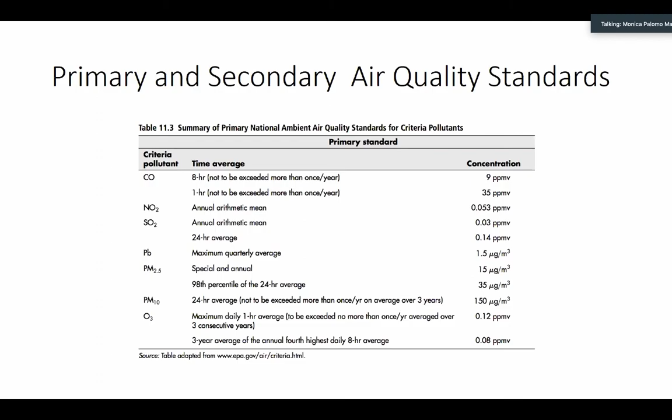So another table is going to show you California standards, and they're different. Many times California is more stringent, sometimes it's just the same, but it cannot allow higher concentration than national standards. National is the maximum concentration that could be allowed, and anything under will be fine if we can meet it. Technically, California has to put a lot of funding to be able to achieve stringent standards.

That's why earlier in the year, I don't know if you heard that Trump was going to modify some funding for California because we were very harsh on the standards for air quality. So that was one of the things that was going to happen due to California investing much more on achieving these stringent standards. So let's go back to carbon monoxide as we just talked.

So similarly, you can check. What are you going to do? You're designing something in California, you need to observe California standards. And if you observe California standards, you are always going to be meeting the national standards. But if you go somewhere else, another state, you need to observe the national standards and check if the state has different standards.

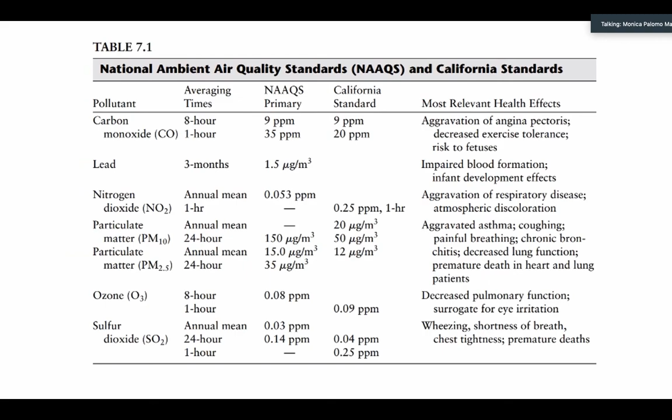So maybe in a problem, I can ask you, for this value, why would this be healthy or unhealthy, or describe the conditions of the air, giving AQI or giving the standards, and we're going to be doing problems. Actually, we have done problems already with a motorcycle, comparing to 9 ppm. I don't know if you remember the problem in the chemistry part. So we have done some problems, not with the AQI, but with the air quality standard. For the motorcycle, the carbon monoxide concentration came from this table, 9 ppm, right here. We used this in the past, I just didn't bring it up because I didn't want to throw a lot of new information at once and make you more confused.

Okay, so what are the effects, the health effects or concerns? It's not only about the health of humans, which is one of the most important things, right?

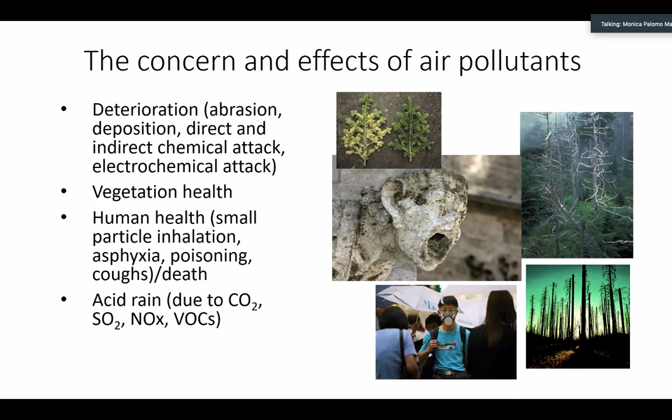We talk about toxic contaminants, particles that could be damaging our lungs. We have talked about acid rain coming down into trees or streams. All those acids can also be damaging for trees and for historical buildings, especially in olden times. Many buildings were built with calcium carbonate materials, and acid rain is dissolving calcium carbonate. Calcium carbonate is alkaline and tends to absorb hydrogens, and acid rain has a high concentration of hydrogens. So they combine and the carbonates wash off, or are dissolved. That's what happens with this sculpture here, being erased because of the dissolution of the minerals. So there is health, historical, and also ecological effects of pollutants in the air.

Any other effects? Ozone depletion, we were talking about. We have, or had, a hole in the ozone close to the South Pole, and the ozone is a barrier that protects us from the UV light that comes from sunlight. If there is a hole in there, the UV can come through, and then we could get cancer. It's too intense for our cells and damages the cells, producing carcinogenic cells.

Also, we are releasing a lot of emissions. The emissions are heating up the atmosphere, increasing the temperature, and that is causing a bunch of disasters. We're talking about climate change here, and the greenhouse gases released to the atmosphere are contributing to it. The greenhouse effect comes from CO2, but can also come from other gases like methane or the CFCs that are released from AC units that we have and need, and our refrigerators too. So there's got to be someone smart who wants to make a lot of money finding a different type of technology that can provide the same services without the same level of contamination.

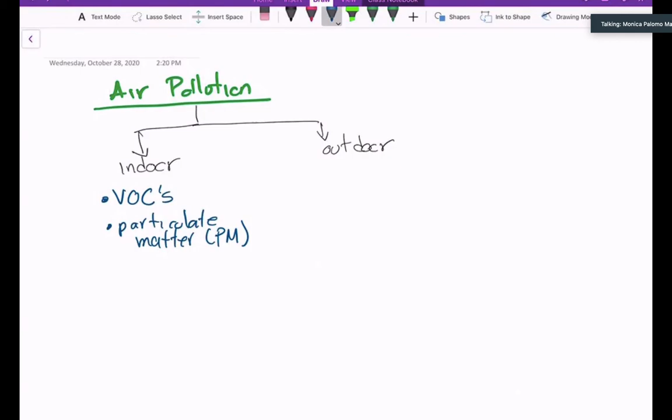Also particles, or particulate matter. PM is going to be very important. You need to make sure that you change those filters to ensure that the particulates are removed.

Outdoor, we're going to have industrial emissions. And also we can have emissions from nature. Can you give me an example? Some emissions are naturally occurring all the time. Volcanic eruption—there you go, Kelsey. Thank you so much, volcanic eruption.

What about CO2? Wait, that doesn't count as pollution, right? CO2, yes, it is pollution. Oh, okay.

Okay, someone is saying methane. Where is the methane coming from? Is that natural or is that industrial? From animals, methane from animals.

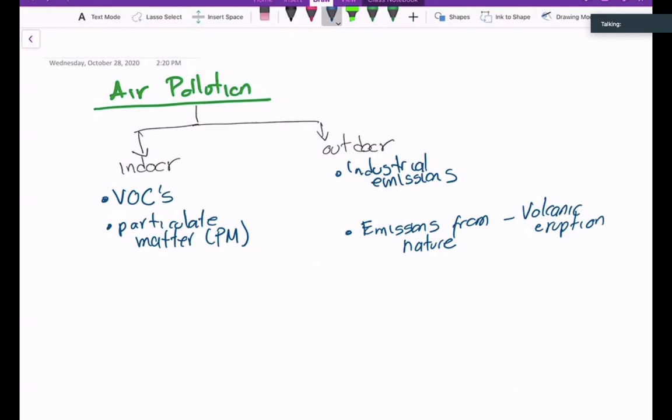Alrighty, okay, so I really like these ones. Emissions from nature—so would you say that animal facilities would be considered nature or industrial? I would say industrial because they're not necessarily like in nature, they're more like mass produced per se. I don't think it would happen naturally if they were in the wild. Well, I think if they were in the wild, it wouldn't be that many—probably maybe would be the concern.

So we're going to put it under industrial emissions, right? As for example, farms, animal facilities. And here we can have methane, right? Methane being produced, released into the atmosphere. All right.

Okay, what other type of industrial emission? Now that we went into industrial emissions, what else? Factory emissions? Factories, yes, thank you. You gave me what I needed, Brian.

Okie dokie, anything else from nature? Could it be like dust and pollen? Yes, perfect. There are naturally dust storms in New Mexico—have you heard about that? Dust in general, let's just say in general. And the dust storms in the Sahara that occur too, just naturally, and that represents pollution.

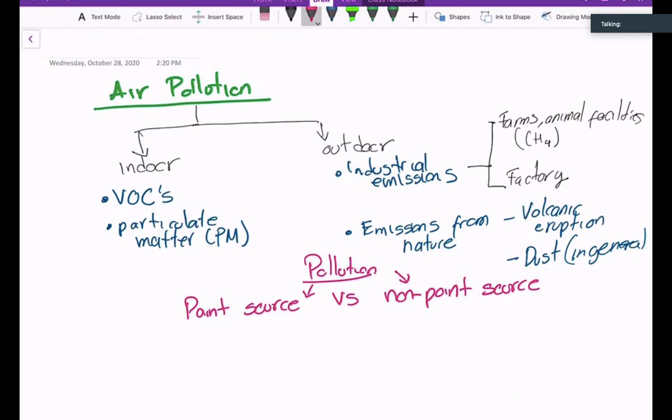Have you heard about point source pollution and non-point source pollution? No? Well, if you haven't heard about that, you're going to hear a lot about this in environmental engineering. The way that you propose your treatment is going to be related to the source of pollution being a point source versus a non-point source pollution.

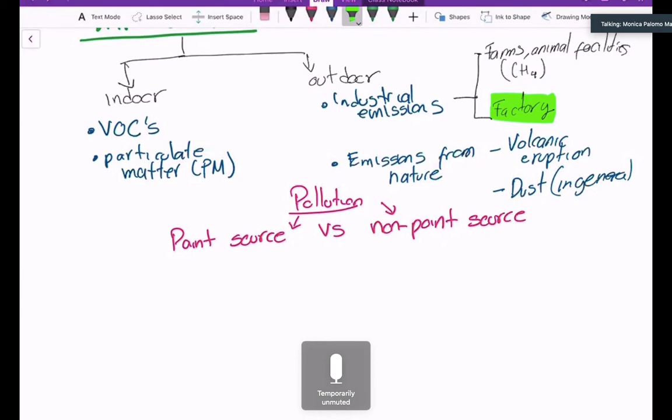So let me use the example of the factory. If we go to a factory and we walk around the facility, do you think you would be able to identify the place where they discharge the pollutants into the air? Just by visual inspection? I think in certain factories. In certain factories? But it's air, right? Gotta be something—if it's not, even if it's air with a different temperature, you will see the column of gas that just looks different in density because of the change in temperature.

So if you have ever been in a place where they do processing of the petroleum to produce gas—the refineries—have you ever been in one of those commercial industrial areas? No? Well, it's not a pretty place. So you can easily see the tower, and you can tell the emissions or the discharge of the pollutant into the environment very easily.

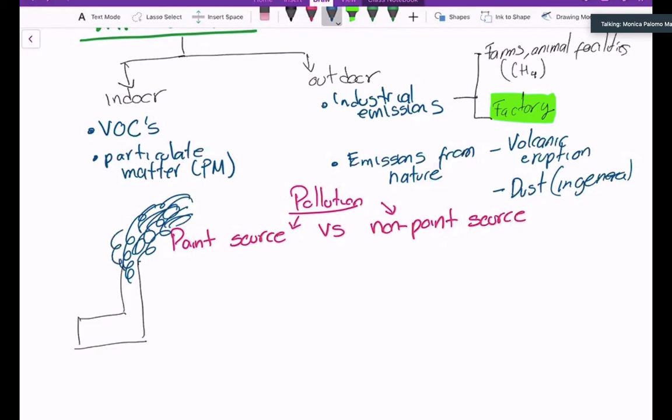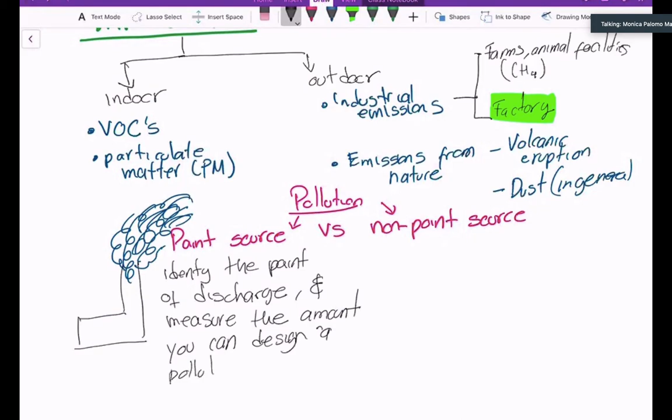If you can identify the point of discharge, and measure the amount, you can design a pollution control measure. What is a pollution control measure? Just a system that is actually going to be treating the gas. So if you can identify the point of discharge, you can measure the amount of the emission, and you can design a pollution control measure—that is a point source of the pollution.

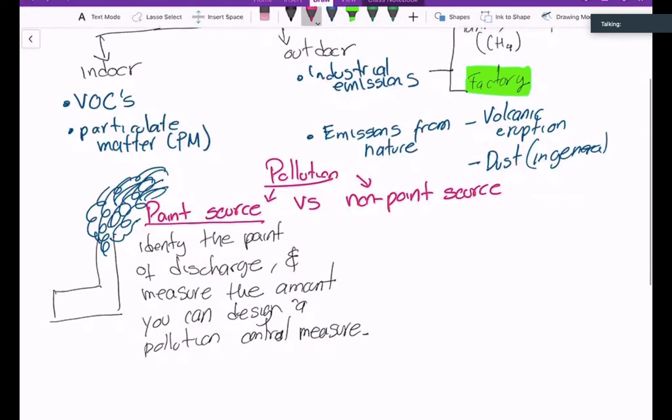So this is very, very easy—a factory is one example. Can you give me another example? One very close to you. There you go, thank you. Someone in the chat is saying vehicles. Your car is a point source of pollution. Why? Because you know where the emissions are released. And do we do anything to treat the gas before it's released into the environment, or do we just let the gas produced by the combustion go into the air?

Typically, car exhaust systems have filters in them to try to mitigate as much of the pollution that will be emitted. But at the same time, that's part of the reason why we have smog checks. So the cars have air filters, to ensure that the air is filtered clean, and then we have smog checks.

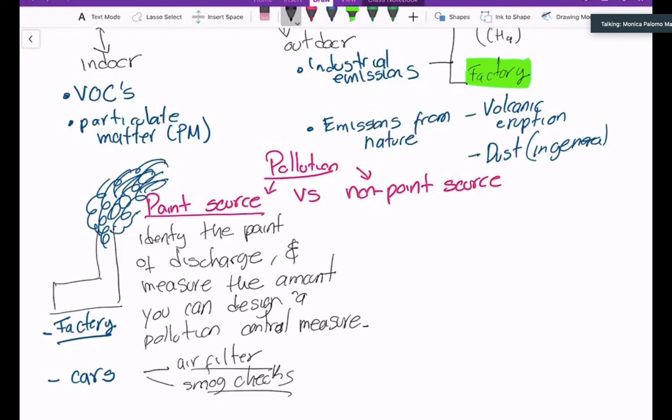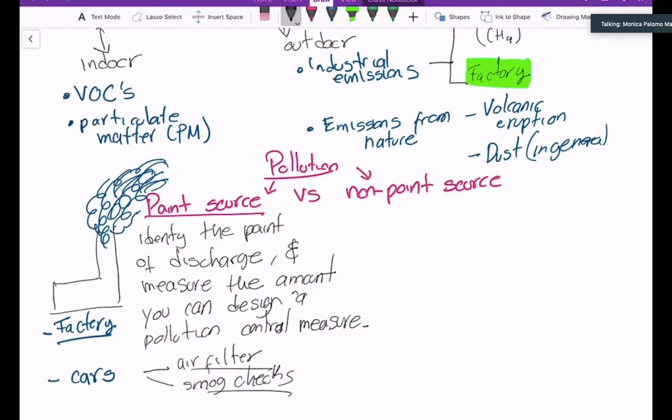So can you tell me, can you visually identify the point of discharge in a car? Yes. Can we measure the amount of the emission? Yes, not visually, but we can take it to the smog check and they will check the emissions. And is there any device designed to control or reduce the emission of the car?

I think on cars it's called a catalytic converter. So it might be very specific technical terms. Also, you have to take the car for regular maintenance to ensure that it's up to speed and doesn't start burning inefficiently, releasing more toxic particles or decreasing the quality of the emissions. So it would be fitting the definition of point source pollution.

Now, what is a non-point source pollution? What do you think it is? You don't need to give me the definition, just give me an example, whatever is easier.

Contamination in groundwater, there you go. That's perfect, let's put contamination in groundwater. Why? There might be multiple points of entry in the water table, or you can't identify exactly where it's coming from. The contamination in the groundwater is underground. We don't know where it's exactly coming from. It's really hard to determine what is the hotspot, the one with the higher concentration. So we're going to be blind with groundwater.

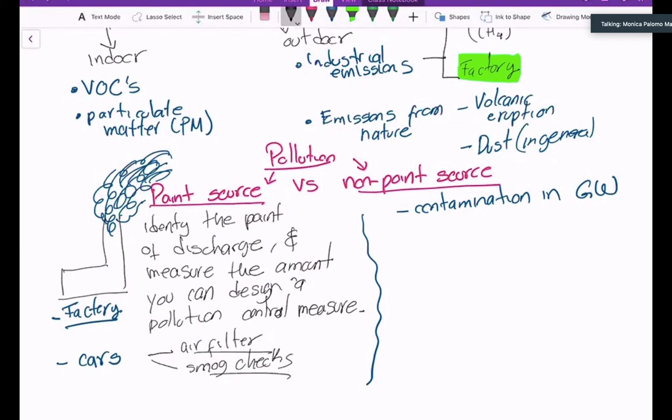Any other example? Stormwater runoff. Yes, why would that be a non-point source pollution? Because the water travels across urban areas and then is discharged into one location, so you don't know what's in it or where it came from.

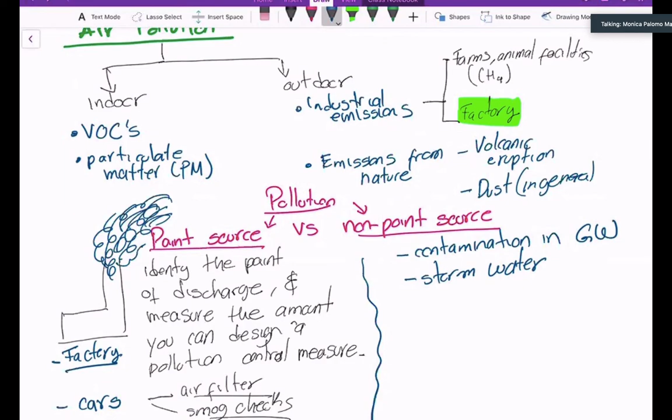Exactly, stormwater could be going through different areas and dragging all the pollutants with it. There might be some ways to mitigate this pollution, but it's going to require a large land area to do something about it, versus point source pollution which is smaller and very well defined. I'll give you the third one since we already have it on the board: farms and animal facilities.

Some of you are saying there's going to be some methane coming into the air due to animal production. Yes, the animals are going to be out there, we know exactly the area where it is, but we cannot really capture all the methane from the cows, treat it, and use it for energy, because it's just out there over too much land.

So when we're talking about non-point source pollution, we have an idea of the area where the pollution occurs, but it is difficult to quantify. It can be coming from many different places, it can have many sources, it can be moving, like the cows. And then it's going to be hard, it is difficult to have a central treatment.

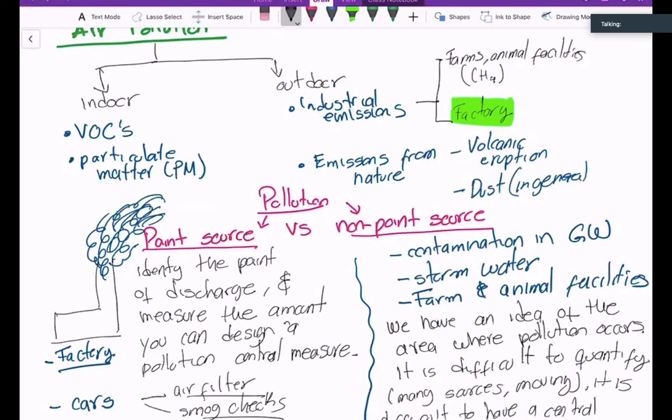So what do we do? How do we do this? Well, every cow is going to have an average discharge of methane, and if we have 2,000 cows, we have a limit on the discharge of methane. And if for any reason I have more cows because I want to make more money, then I need to pay some money because I'm exceeding the limit of discharge. So it's kind of ishy-wishy.

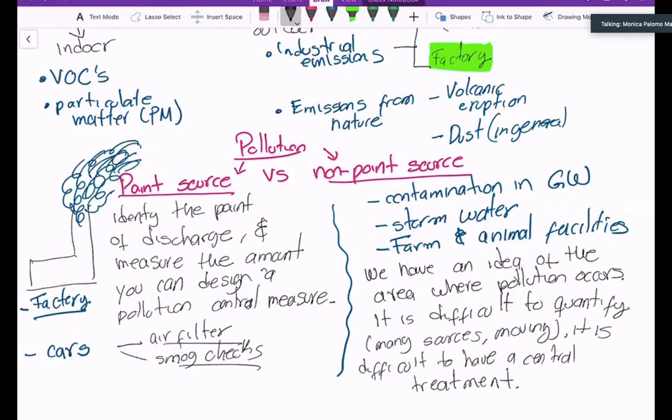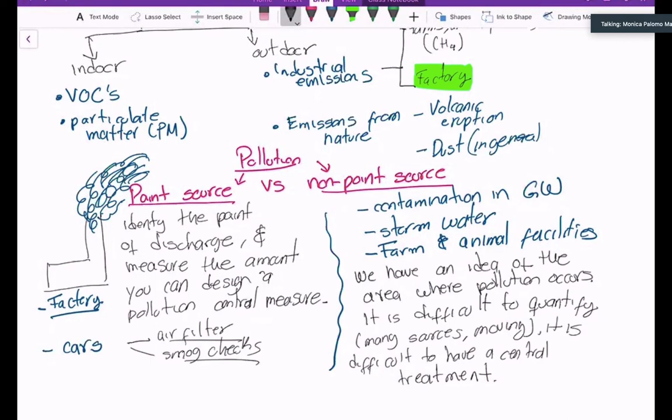In this non-point source pollution world, sometimes whoever is contaminating in a situation like this, or responsible for such type of pollution, needs to pay a fine, or someone that is not contaminating as much gets paid by that person, because they get credit for not contaminating as much. So if you really like politics, you're going to love the non-point source pollution world. It's a lot of trade-offs and exchanges of credits for the pollutants that are released or not released in a given time. So there's going to be permits depending on what is happening.

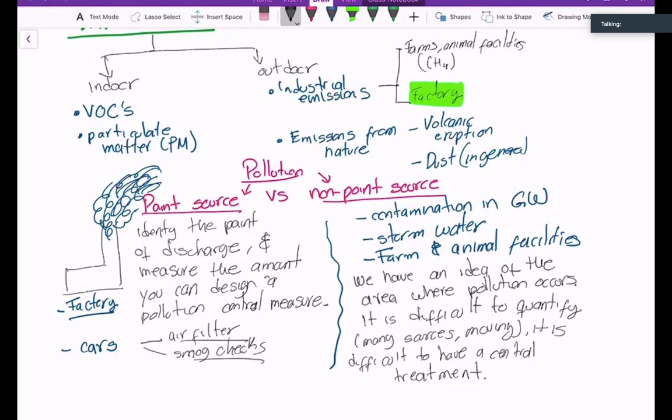So does it make sense now? Point source and non-point source pollution? Right? Thumbs up. No, there is no thumbs down. Only thumbs up, right? Okay, some of you are saying yes on the chat.

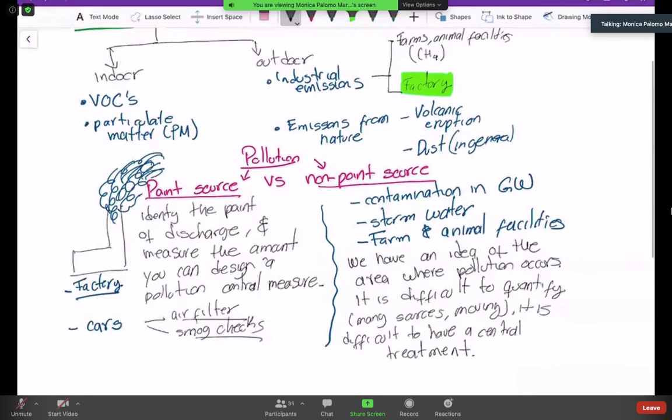Perfect. All right. So let's talk about emissions, and we talk about primary pollutants and secondary pollutants. Just to make sure that's on your notes.

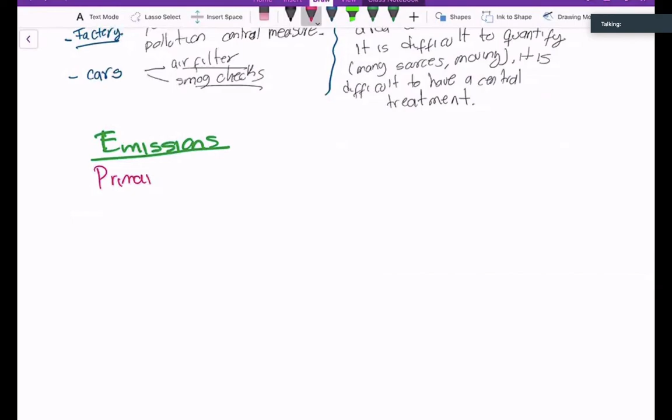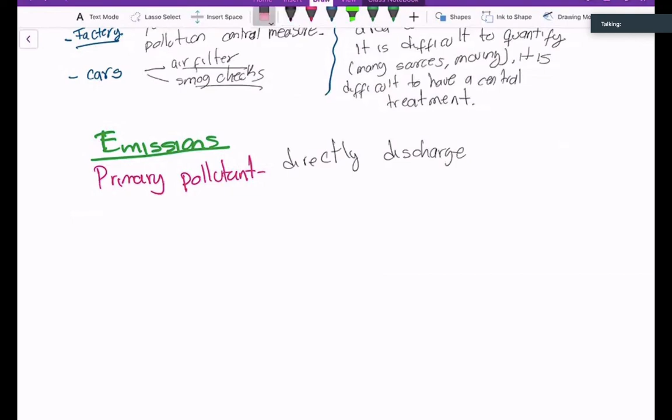We have primary. Why do we say that's the primary pollutant? The one that is directly discharged. Thank you. Directly discharged in the air. And then we're going to have a secondary pollutant.

And how do we differentiate them? Secondary pollutants are the result of primary pollutants and their reaction with the atmosphere. There you go, they are formed in the atmosphere. Thank you so much. How are they formed? Due to reactions. They can be chemical or physical reactions. Okay, so chemistry is always going to be with us.

So I'm going to be changing the page. Is everybody okay with this? Everybody has it down? Yes, I have most of the tiles up, so give me thumbs up, or maybe the chat. Alright, okay. I'm going to be checking with you. Someone told me today in office hours that sometimes I'm going too fast and you miss things, so before I change, I'm going to be checking.

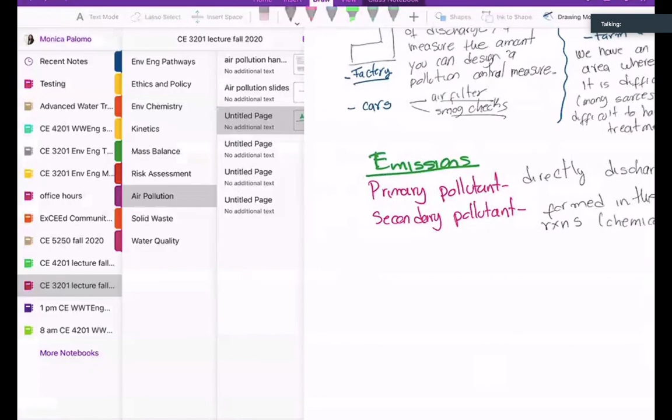Alright, so I'm going to change now. I saw the thumbs up. Page number 2. So I don't think that I mentioned this, but I think it's very important to put here that the pollution is categorized by the way it has been created, the pollutant emissions. So pollution emissions can be classified by how they were created.

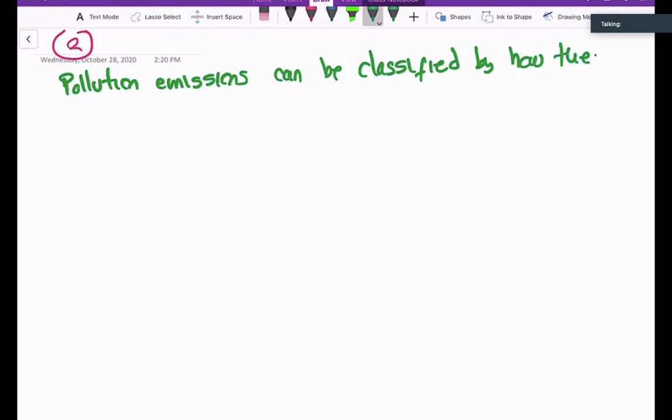And one of them is going to be combustion, and we have talked about that already, the cars and the combustion of the gas or the fuel. It could be evaporation, and we have talked about that too, VOCs, right? And this is just making it very, very specific. And the last one that we have also talked about is grinding or abrasion, and that's formation of particles from solid particles. So the PMs, the particulate matter, can be formed due to the grinding.

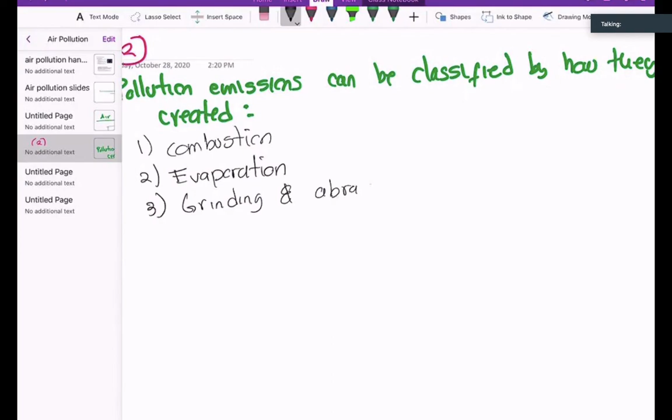Grinding and abrasion. So these are the 3 different ways that we could get those particles in the atmosphere, or indoors even.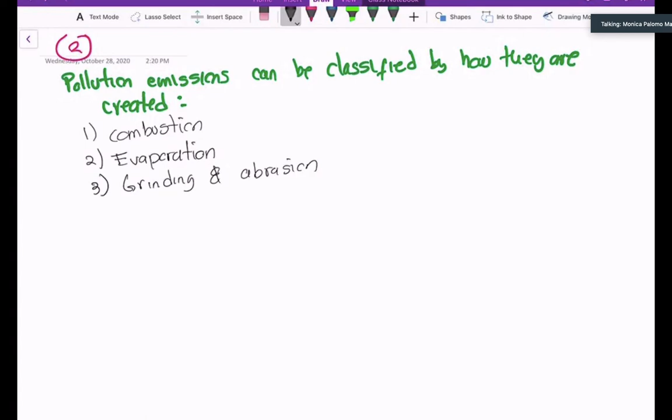The source of pollutants, we already talked about them, this is just slightly different. Could be mobile and stationary. Can you give me some examples of mobile or stationary?

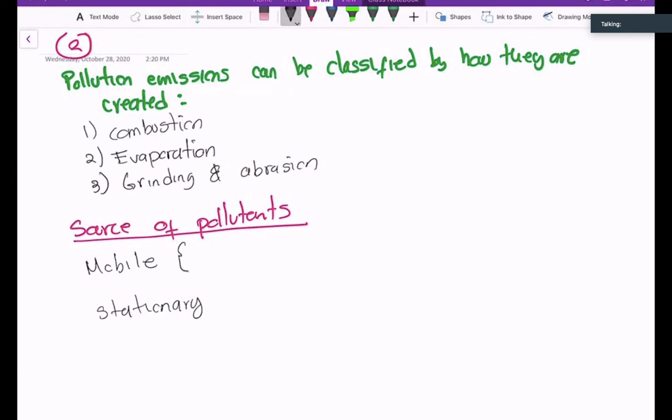Just think about the air. What is moving? Mobile, cars. Cars, railroads. Well, let's put it in here. It's trains, ships, planes. What about cows?

Cows move around, right? And what's stationary? Factories. Okay, what else? Power plants. Gas stations. Gas stations, yes. Or homes are stationary. Oh, you got it, someone said it as soon as I mentioned it.

We were thinking of like homes. Homes are stationary too, unless they are, how do you call those that you drive around? I forgot. Well, you know what I'm saying, those moving homes. RV. RVs, yeah, thank you, like I was escaping. And the farms, right? Farms and all the agriculture facilities, etc.

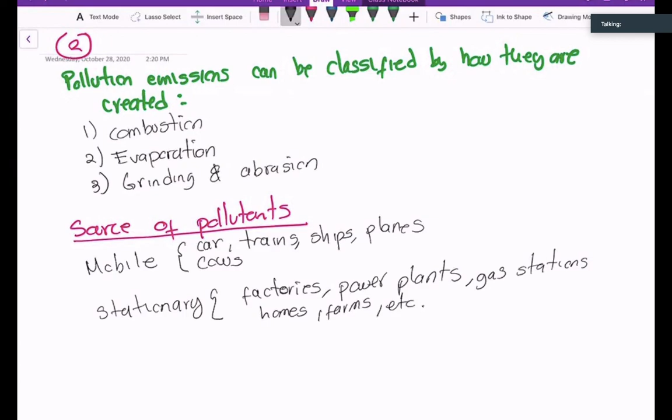So there are a bunch of things that cause air contamination. Okay, who can tell me the 3 different things that we talk about in terms of air policy or regulations? No?

Remember that we talked about the Weather Channel? Are you talking about today or a different one? Yeah, today, just a few minutes ago when I had the PowerPoint up. The National Ambient Air Quality Standards. Mm-hmm. National Emission Standards for Hazardous Air Pollutants. Okay, oops, and what was the last one?

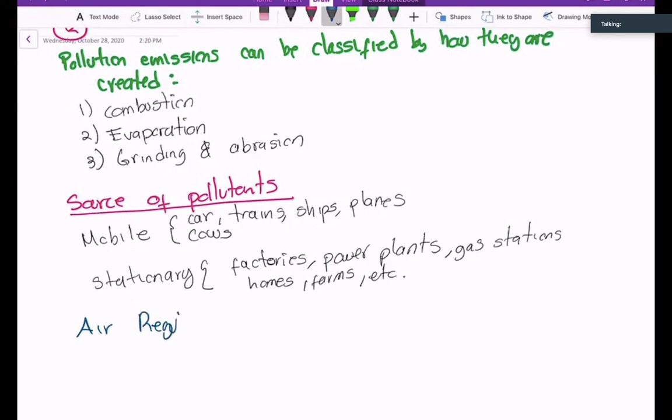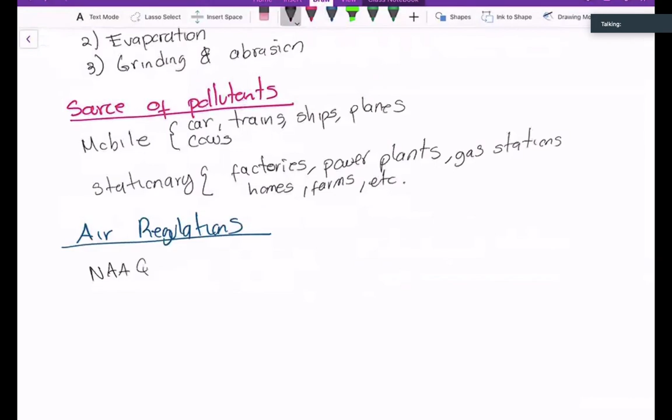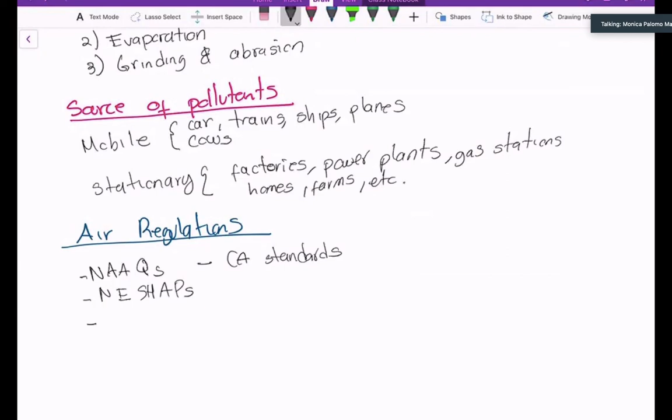Next, NESHAPs. And what is the last one? Anyone remember? Was it the California standards? Well, we can say California standards too, next to the national air quality standards, right? And that parameter that sometimes is given in local stations, weather stations, the AQI, air quality index. So these three are all under the Clean Air Act, established in the 1970s.

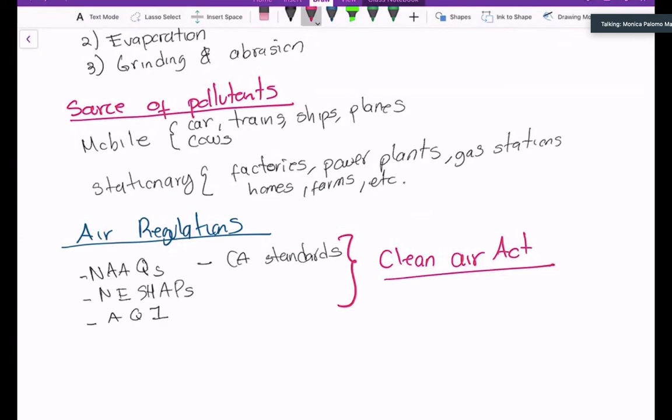All right, so I'm putting everything together just to ensure you can go back and remember what we talked about. Now we're moving from air quality standards to indoor pollution, and point source versus non-point source pollution. I'm going to take you to the point source pollution world, and classify the ways of pollution control, the types of treatments or technology that can be used to control contamination coming from point source pollution.

So this is going to be air pollution treatment and control for point source. Factories, okay, that will be an example. And I'm just going to leave it in there.

One is gonna be gaseous, and the second one is gonna be the particulate matter. Let's talk about the gaseous one first. I'm gonna list them, and then we're gonna go to the slides to show you photos of how they look, and then we're gonna do the design of two types, both for particulate matter.

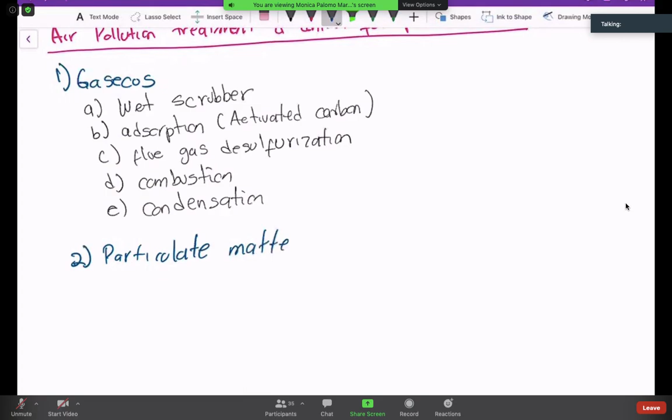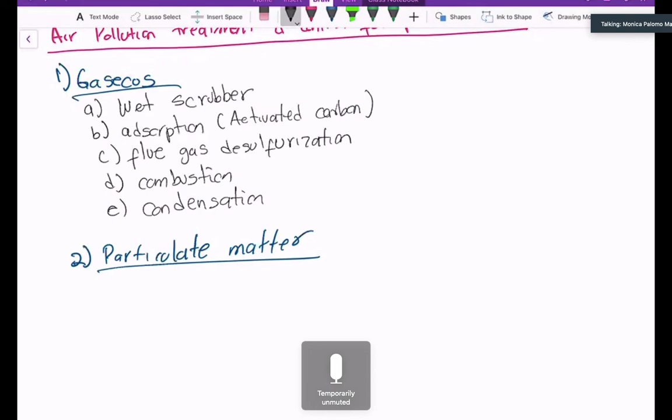Professor, what does it say under C? Combustion? No, C, part C, right after B. This one? Yeah. FLUE, flue gas. All right, thank you.

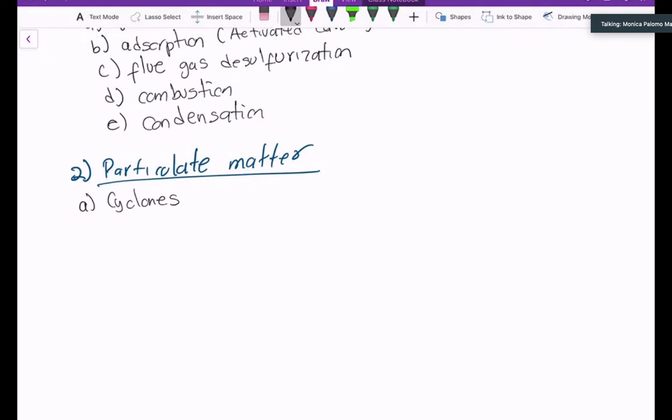And then for the particulate matter, we're gonna have cyclones. Cyclones are just towers that spin the air, producing different velocities for particles and air. They're called collectors, cyclone collectors.

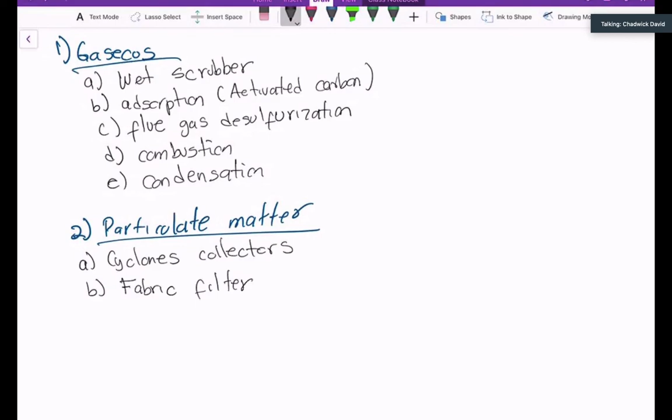Dr. Palomo, maybe you could scroll up to number one. Yes. Okay, that helps. Yes, I push it up most of the time because then my hand is below the outside of the iPad, and I tend to erase. What did it say above it where it said gaseous? I don't know if I got that down. It's gaseous, yes, it's gas. Was there anything above that though? Oh, okay, there we go.

All right, then we have fabric filter. Have you ever used a vacuum cleaner? Yes? At least seen it? Well, it's similar to a vacuum cleaner, very similar, especially the older ones, the ones my mom had when I was little, long time ago. It's very similar to that one - you could take the bag out. These fabric filters have bags in there that you can exchange when they're full.

And the next one is going to be the Venturi or Venturi scrubber. It's a combination of the principle of the wet scrubber with the Venturi. And then we're going to have electrostatic precipitator. And then finally, sedimentation, or gravitational settling chambers.

This settling chamber uses exactly the same principle that we will use later to design settling basins in water treatment or for wastewater. So it works for any fluid, just with a slightly different density depending on the fluid we're working with.

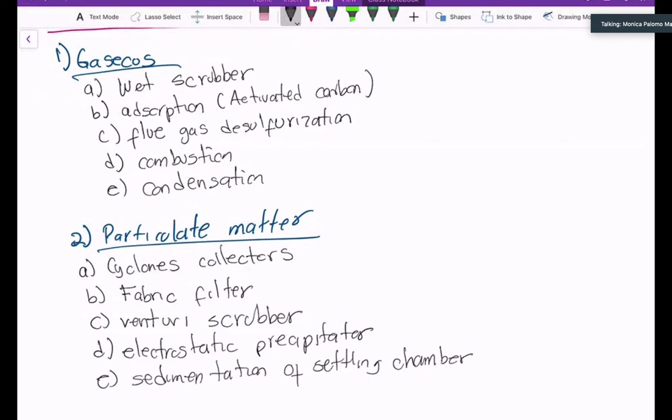So again, these are different pollution control measures or systems for air pollution, for gaseous pollutants and for particulate matter. What are the sizes we're going to be looking to remove from the air?

Remember the sizes: 2.5 and 10 micrometers. Remember the units. Sometimes on the test I ask what unit is associated with the 2.5 and the 10, and students always answer meters. I'm like, oh no, that cannot be particulate matter. Just think about the unit.

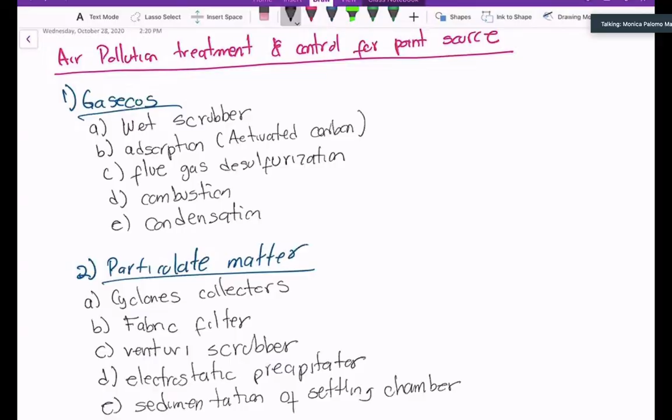It's micrometers. Okay, so I just got off the whiteboard, and let's go back to show you the different ways of treating the air with photos. We're going to be doing some design problems with it today. All right, so I'm going to go to the laptop now.

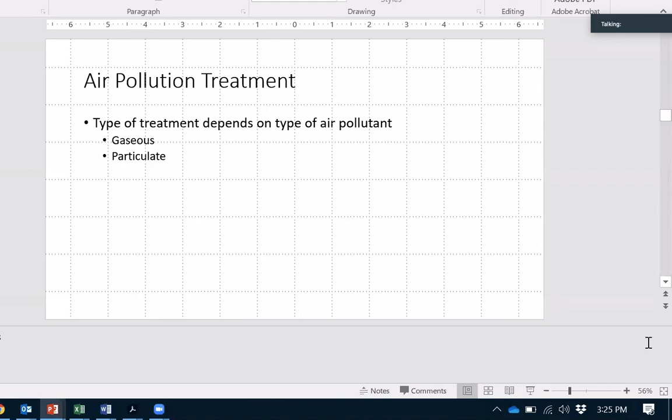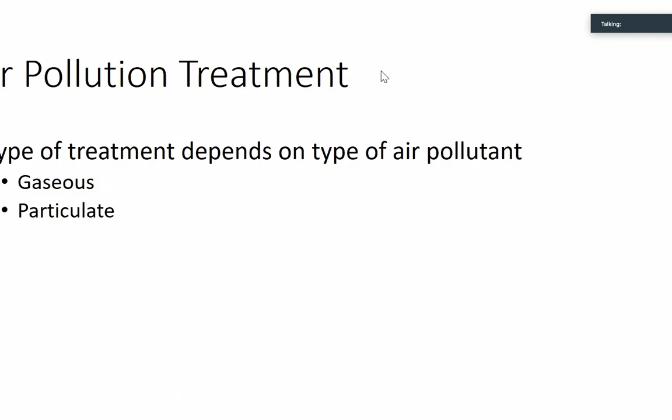see it. All right. Okay.

So we talked about the two types of pollution control, gaseous and particulate matter. Now we are going to show you how they look.

The great news for us is that all of this is commercially available, so we don't really need to design or size the tower ourselves, or have an idea of what size we need based on the flow, how much air we're treating, and what the concentration of the contaminant is that we want to remove. We do need to know that, but we're going to be working with the vendors of this equipment, telling them the air quality and the flow rate of our air, and they're going to help us select the best size.

You're going to tell them if you have any restriction of space where you're working, or whether the area is indoors or outdoors. They're going to tell you about the ventilation requirements. So in terms of design, it's going to be a lot of work with the vendor. You just need to know the flow, the concentration, and the type of pollutant, and they'll tell you what's inside.

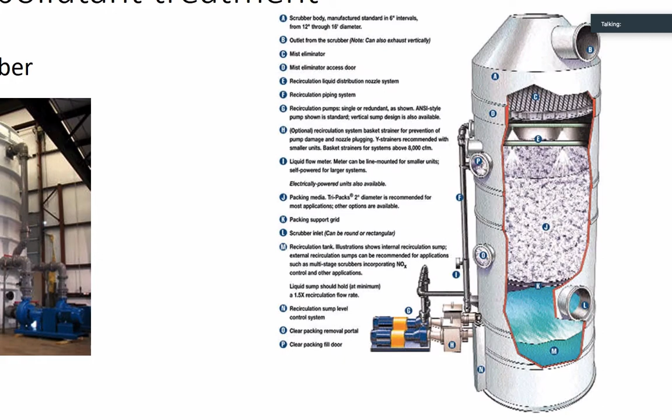It's going to come through the water, and as it goes through the water, the gas you want to remove from the air is going to be left behind in the water. There may be some droplets that come up with the air, and that's what another bed of media is for — removing those liquid droplets and any gas that might still be in that liquid. Then finally, there's another layer on top.

It's very small, but it's like a mesh labeled C that helps dry or remove moisture from the air before it's released at the top of the device. So it's a very simple process. The only thing you need to take care of is knowing the liquid and the packing material, just to make sure that's what you need for the gas you're trying to remove from the air.

Also, what about the removal rate? Based on your concentration, you may or may not achieve full removal, so don't think you need to design for 100% removal. What number do you need to design for at the outlet in this tubing labeled B? Do you want to get all the way down to zero?

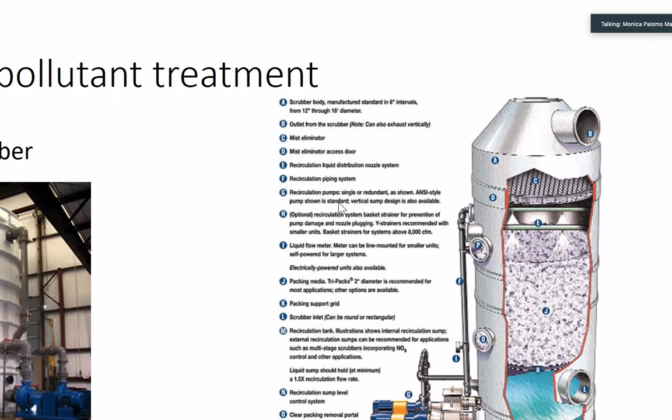How low? I don't know a chemical specifically, but what number will be here for you to do your design? Standard. You need to be looking at the standard. Are the standard, or maybe this company has a permit that allows them to discharge this amount per year, per day, per month, and based on that you back calculate how much will be discharged depending on the flow you're discharging and for how long, etc. So it's important that you keep that in mind.

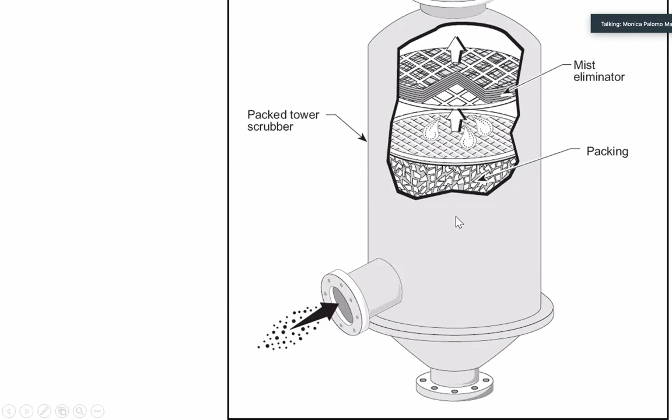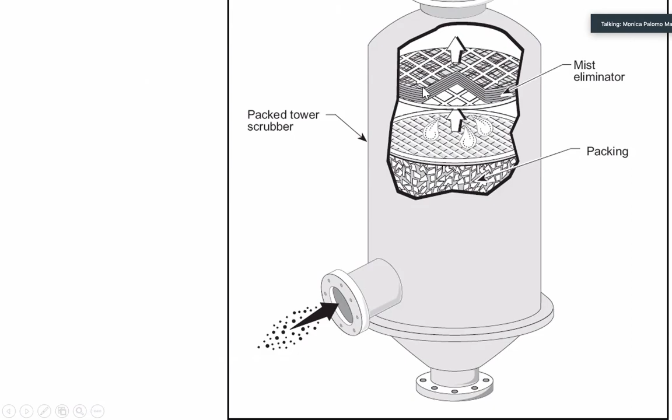This is another image of a wet scrubber, a simpler one. The air goes in on the bottom. There is a pool of solution in there that is going to be scrubbing the gases. And then the air continues up through the packing, whatever the packing is, and the meshes to eliminate the moisture, and finally goes up. It's a very simple way to put it. It's just important to know the details of what's in the packing.

There is another way of treatment, and we already talked about this: adsorption with activated carbon, which is going to be one of the easiest ones to go. In this case, you will need to size your tank or your system. Some companies already have those commercially available, and you will just need to say, depending on your flow and the chemical, calculate based on the givens from your vendor what will be the adsorption time before you exhaust the bed in the carbon, and then see if you can clean it and recover it. Usually that's going to be done, or you need to remove it and just incinerate it.

Combustion is the next way to remove something from the gas. I don't think that this is the best way to address it. Usually these are going to be volatile organic compounds. They need to be ignited to be able to go to combustion, to be removed. I have seen, I don't know if I've shared with you, I am from Mexico, and combustion of gases that could be oxidized in air was one of the most common ways of removing them from the air when I was back in Mexico. So I don't think that is really friendly for the environment, but it's done.

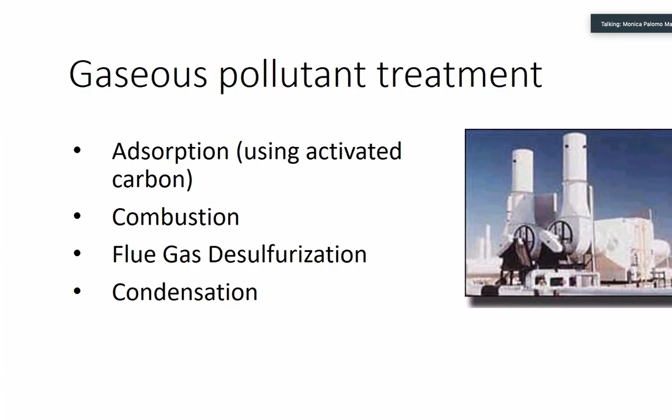The good news is whenever we do this type of treatment, we're going to have a vendor working with us and selecting the best option. And if you're working with this type of pollution control device, you're going to have a senior engineer working with you, probably guiding you on what would be the best one. In many cases, the young engineers are going to go and do the search and talk to vendors, and the senior engineer is going to come and decide which one to go with after having all the information. Or maybe you're working in the public sector, you might be looking into whatever the engineers bring you, and then you need to know which one might be better.

You know your city, you know the facilities, and maintenance is going to be very important to keep in mind if you're on the public side. Maintenance and operation, what kind of operator you need, the grade, and how often you need to clean something. So the young engineers, when doing this type of design, need to provide a maintenance and operation guide for the client.

So you could be either on the client side or on the team that is designing. Let's talk about particles. It's a physical process because we have particles.

We have an advantage when it's related to air. We can easily trap the air in one of these two systems, the cyclone or the fabric filter, and induce through flow the removal of these particles.

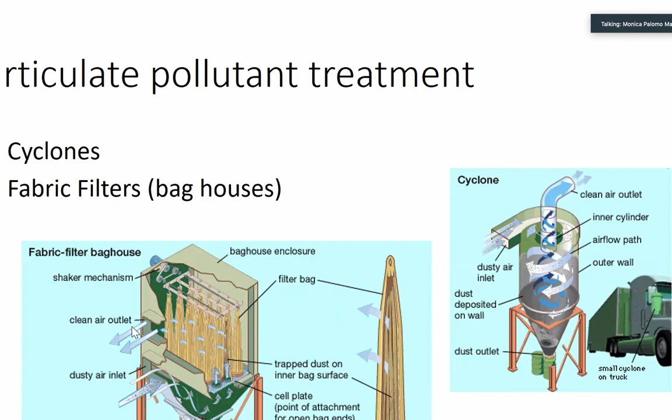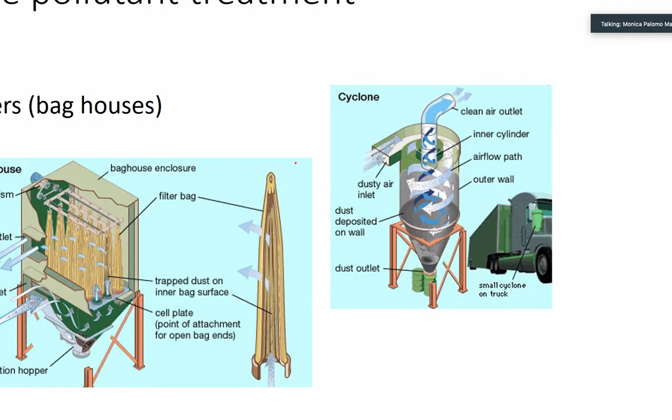The fabric filter on your left is right here. I'm showing you... okay, my pen is not working, I don't know why. No, it's not working, I'm sorry. I was trying to use a PowerPoint tool to show you.

On the center, we have the bag. From the bottom, you can see the air goes through and the particles are going to be stuck inside of the bag. Once the particles clog the bag, then you're going to need to change it.

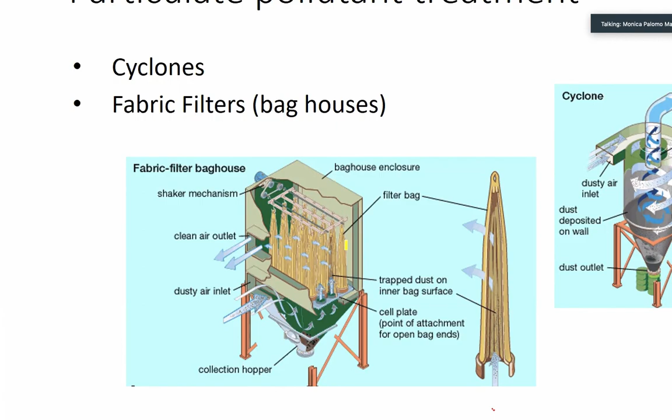The capacity of the filter depends on the flow and the concentration of the particles, which should be on the specifications given by the vendor. The amount of flow you're going to be treating determines the size of the bag. Every bag has a given filter capacity, and based on that capacity and the flow you're treating, you determine the number of bags. So it's a very simple calculation to design the size of your system.

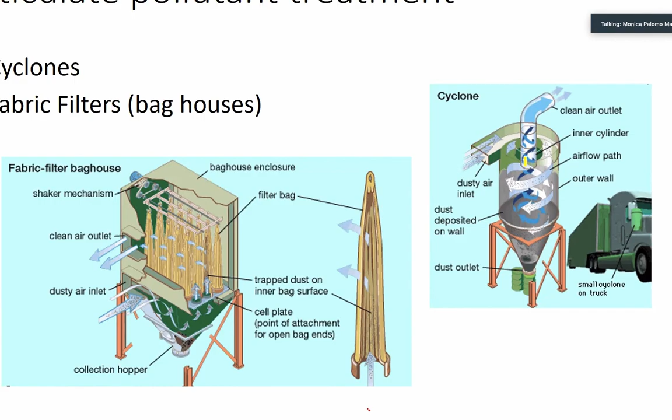What it's doing is pushing the particles, which are affected by gravity, down and precipitating and collecting them in drums or sometimes trucks. Then the air, because it's lighter, goes back up and escapes through the outlet. So pretty simple, nothing fancy.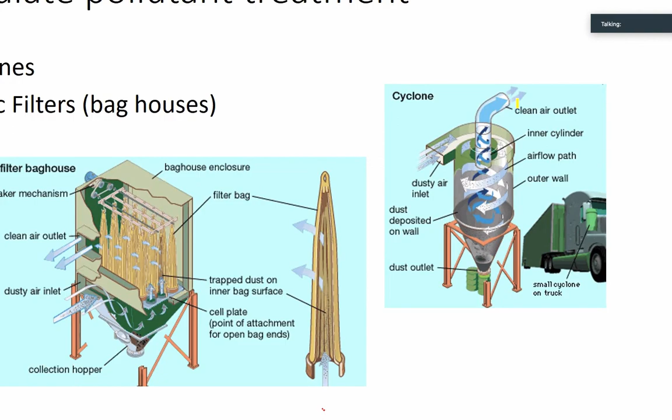Just depending on the flow you are treating and also the particle size, you need to work with your vendor to find the appropriate size to treat or remove particles from a given device, or maybe you already have the particle size and can go directly and look for the system that gives you that.

Now here on the right, I want to show you the Venturi scrubber. It's very similar to water resources—actually, it's the fluids class. In fluids, we talk about ways to measure flow.

A Venturi meter is one of the best, calibrated ways to measure flow. It's used for that, but also because the reduction in cross section increases the velocity, and by that change of velocity we can estimate the flow. By increasing the velocity, it induces changes in how the particle, contaminant, and gas interact, allowing us to separate them just by that change of velocity.

The other exciting one is electrostatic precipitation. Very simple—there are some plates connected to current. There is energy or current always going through the plate. As the airflow moves from one side of the plate to the other, those particles interact with it.

Most of the time the particles have a charge. If there's a current in there, they'll stick to the plate and be removed from the air that way. It's more expensive, but for very fine charged particles, it's one of the most efficient ways to remove them and comply with standards or discharge limits depending on the type of industry you're working with.

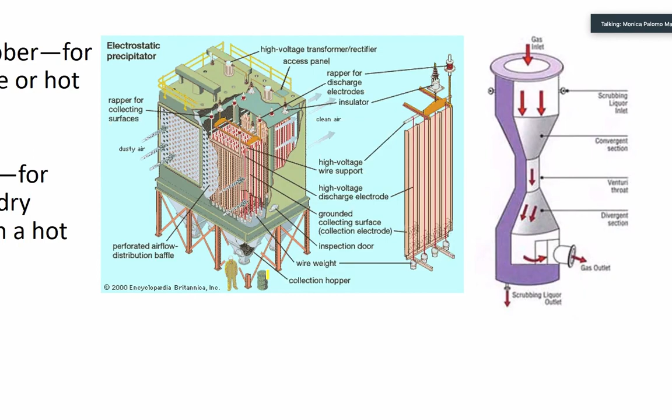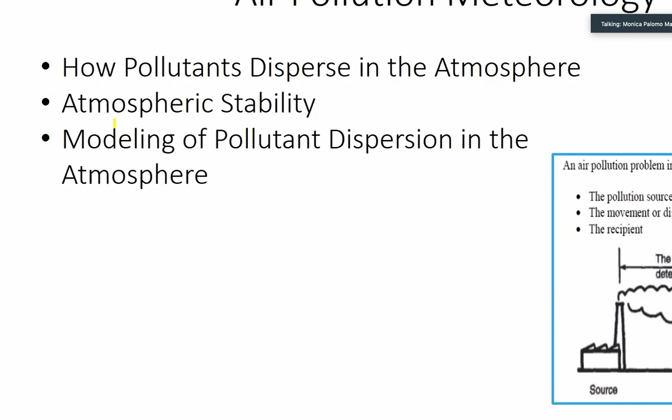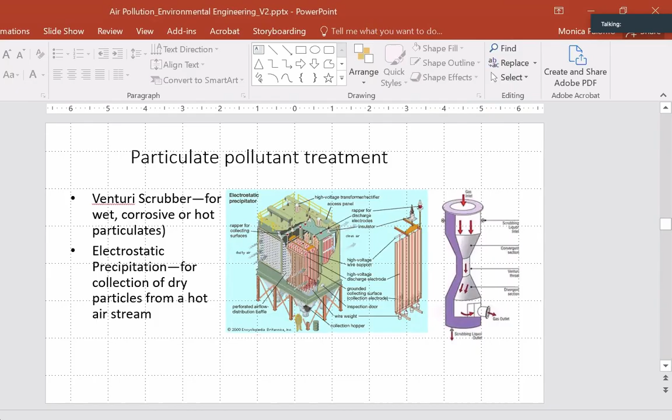So these treatments are very easy to understand. We're going to stop here because we're going to do a problem. We have 6 minutes, so we can start the problem. Questions so far? No questions? Okay, we have a comment on the chat. Oh, no questions, okay, thank you so much.

So now you're seeing that we're going to design, we're going to start sizing or looking into how big, depending on the flow, what is the concentration. We're going to need to use chemistry to size or determine quantities, but it's going to be way more practical—we're going to use that chemistry to help us on our decisions.

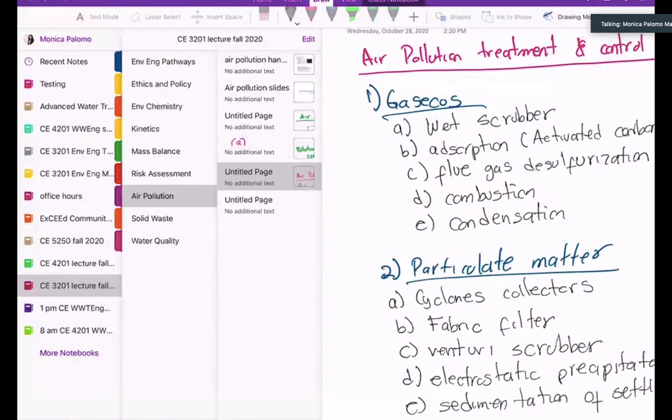So now there is a bunch of practice problems, or in this case, solved problems. There is a bunch of solved problems in your textbook that I want you to start looking at, especially 7.1 to 7.7. Later, the other problems I'm putting in there have some details, like 7.11, the speed change with elevation, or downwind ground level concentration—all of that we're going to talk about in the next section once we do the design problems. But you can start looking at some of the solved problems that are there, okay?

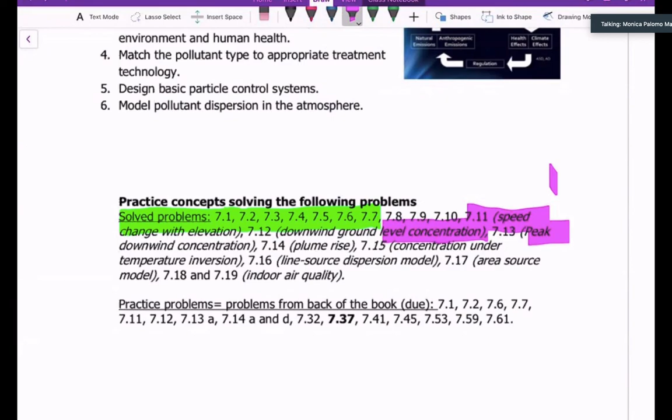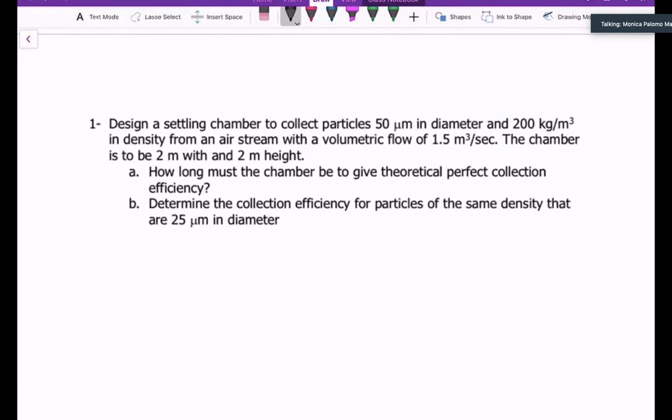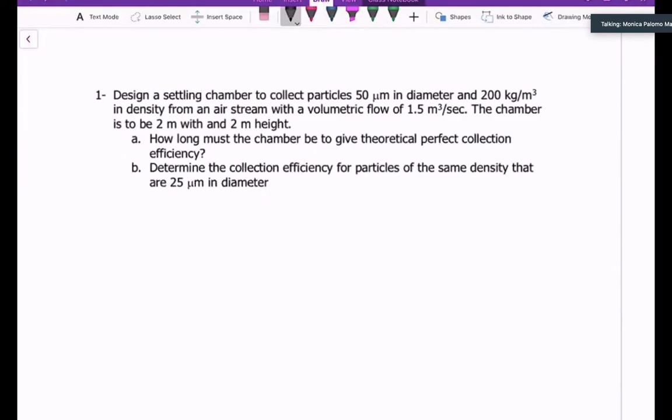So let's go to the settling chamber. This problem is really fun, I really like it—we're going to be actually sizing something to treat air. So it says in here, let's read the problem—we don't have a lot of time, but we have time to understand. We have to design a settling chamber to collect 50 micrometers in diameter particles, and they have a 200 kilograms per cubic meter density, so we need to know some properties of those particles. They are in an airstream with a volumetric flow rate of 1.5 cubic meters per second.

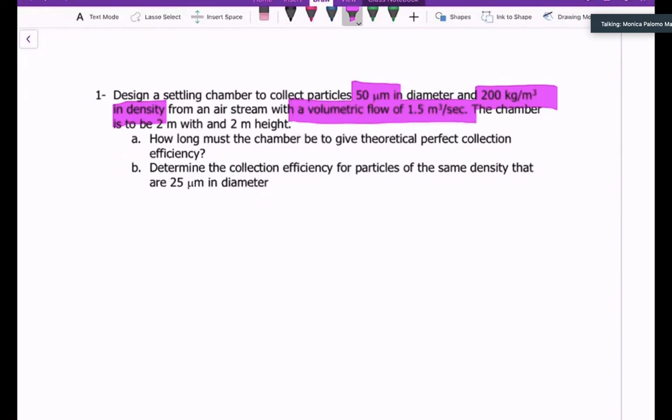The chamber is to be 2 meters width—sorry, that's a typo—and 2 meters high. So we have some of the dimensions. What we need to do is calculate the length of this chamber to give theoretically a perfect collection efficiency. That means 100% removal—this perfect collection efficiency will mean that we can remove all the particles 100%.

Why do we know the chamber width and height? Probably because that's going to be commercially available, and you can just cut the length or give the length that you need to your vendor, and they will, based on the cross sections that they have available, customize your length based on the type of particles and the flow that you're treating. That's why we need to design for the length.

And then that's part A. Part B will be: determine the collection efficiency for particles of the same density, but they are 25 micrometers in diameter. So this problem is completely different. Now with this chamber design, if particles that are smaller, half the size—25 micrometers in diameter—come in, and they have the same density, what will be the removal efficiency?